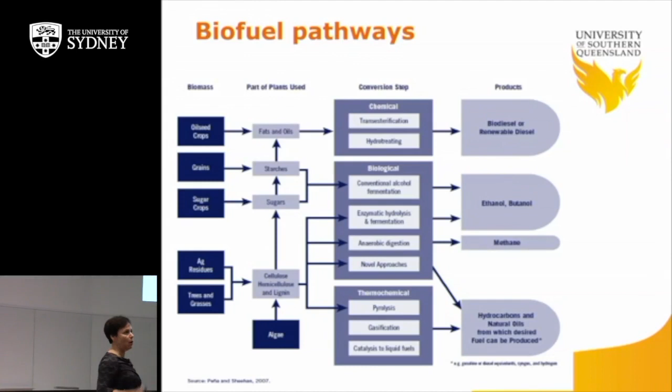Okay? So that's it. Important to understand from the outset that bioenergy includes a hell of a lot of feedstocks with a multitude of conversion technologies to produce quite an array of products. And the importance is that whenever we're testing the feasibility of a project, we're basically technology agnostic. We have a feedstock, but we want to be able to match the right technology so that we get the optimal conversion, right?

So going on to the next part is end utilization, or what are the products. We already had a look at some products, but how do we utilize bioenergy and what's its importance in place of renewable energy? So as we mentioned before, bioenergy is that renewable which is very flexible and will have some really important components that will add into the renewable energy mix now and even more so into the future.

So it's used across all of the energy sectors. So in that regard, its fit into the marketplace is very good. And what we mean is that it can be a form of bioelectricity. So for instance, when we're converting waste into biogas, the biogas can be run through gensets and that will be converted to electricity. So through combined heat and power, we can actually increase that efficiency so that we're also getting use of heat rather than just the electricity, because the actual conversion has a reduced efficiency.

So if you run biogas through a genset, you're probably only going to get about 35% conversion. At best, those gensets do about 42%. So you want to maximise the use of that end product, the fuel. And so if you actually combine that power with heat, you'll get about 90%. And this is where we're saying that it's for heat.

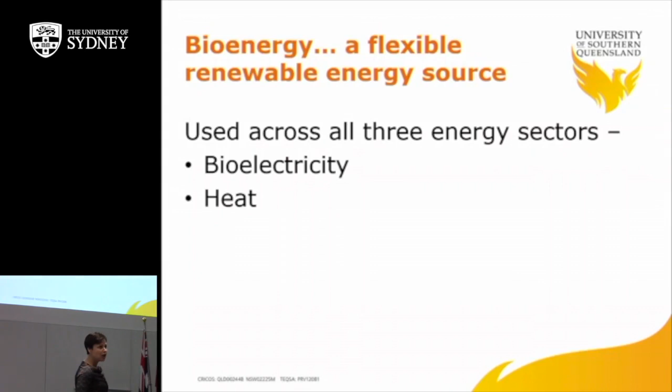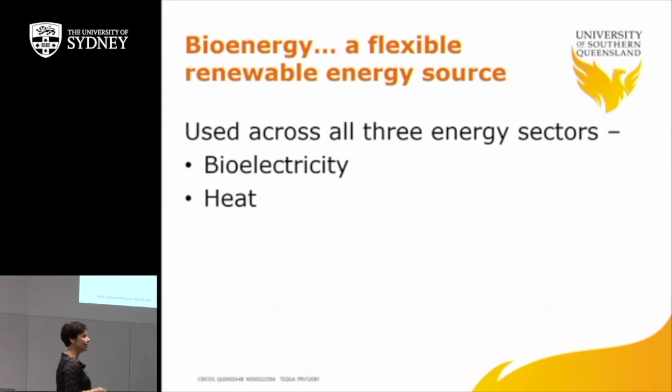In countries in the Northern Hemisphere, where it's very cold as opposed to us, heat is a very good way of utilising bioenergy. Less so in Australia, but we will obviously have other ways to use it in terms of electricity, and what's best to use in different countries. And more importantly, I think bioenergy will gain even more traction into the future as that source for liquid biofuels for transport. Okay? And I'll talk a little bit about that in terms of aviation as well.

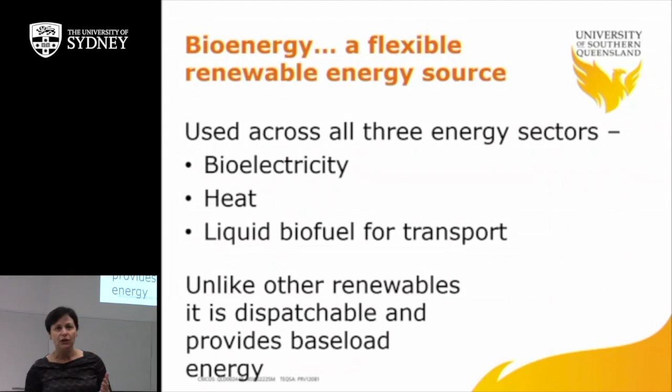There's another reason why bioenergy is important: it's dispatchable. Does anybody know what that would mean, dispatchable? Yep. Yeah, so you can use it at a specific time and start burning it, okay? So you can basically turn it on and off. When you've got renewables like solar or wind, they're only going to go while the sun is shining, while the wind is blowing. Whereas with bioenergy, so long as you've got the process running, it's going to keep going, right?

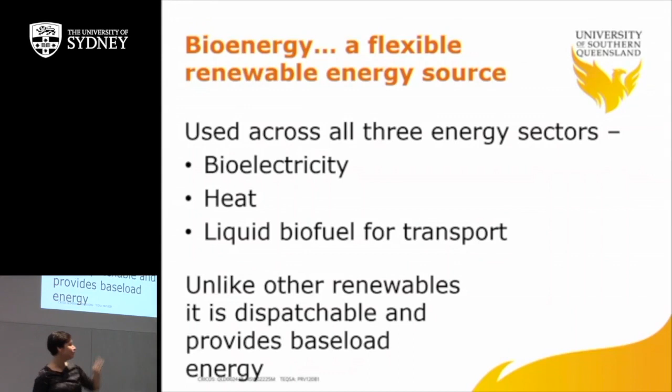It also provides baseload energy. What do we mean by baseload? Yep. Absolutely, it's the minimum amount. You guys know all this stuff. So, for example, our coal-fired power stations, they provide baseload energy. So in much the same way, bioenergy, give them a pat on the back, is going to provide that baseload power, right?

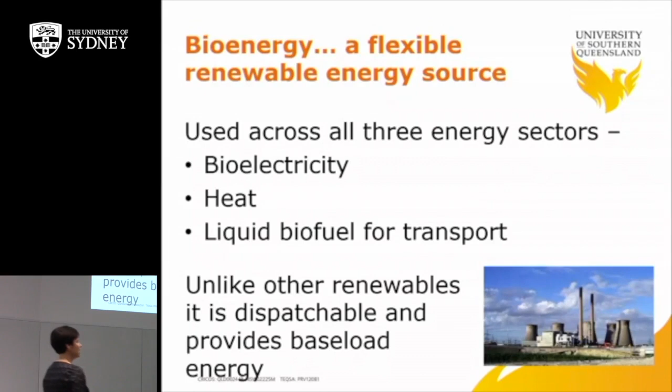And I think you guys have had a talk, or will have a talk, on smart grids, right? So I mentioned that in my interview. I don't know a lot about it, but I know that biogas, for instance, is becoming more important in terms of its use in smart grids as well, right? I won't talk about that because it's outside my expertise, but you can see that flexibility in bioenergy is really important. Okay.

So, I mentioned I was going to talk a bit about advanced biofuels. Not a lot, because I don't know a lot about it, but this question is posed all the time: are advanced biofuels for airplanes ready for takeoff, right? I think there's a number of things that are all coming into place so that they are, right? I think the last decade or so, we've seen a bit of a lumbering takeoff, slow and heavy, like these big things.

But what they've found through, again, matching feedstock with conversions to products, they're getting an understanding of what's socially acceptable, what's environmentally acceptable, and so on, right? So we've had some instances where, you know, the corn being utilised for ethanol, and then there's other things with, you know, the food debate.

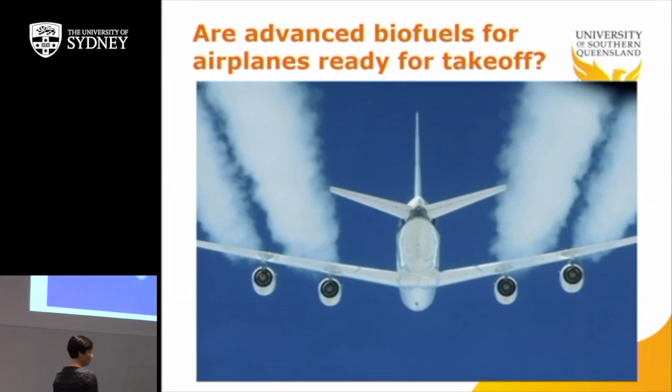And so they kind of become roadblocks to say, well, what's that next advancement? But I think into the future, there will be indeed that point where they've got the right feedstock, the right technology, so that you're not going to get some hurdles in terms of what's socially responsible.

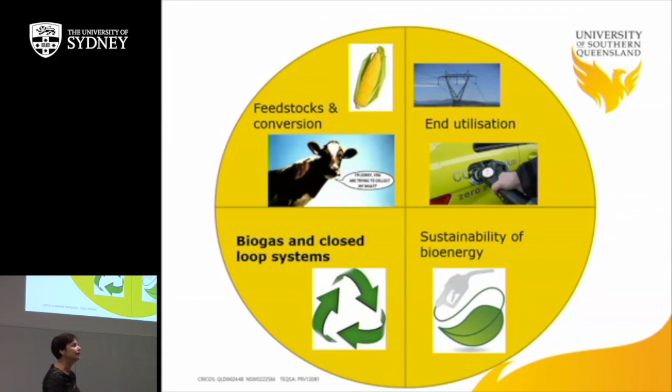So now going on to biogas and closed-loop systems. This is my area, right? I just want to recap where we are. So this is anaerobic digestion. How many people know about anaerobic digestion? Few people, right? Quite a few.

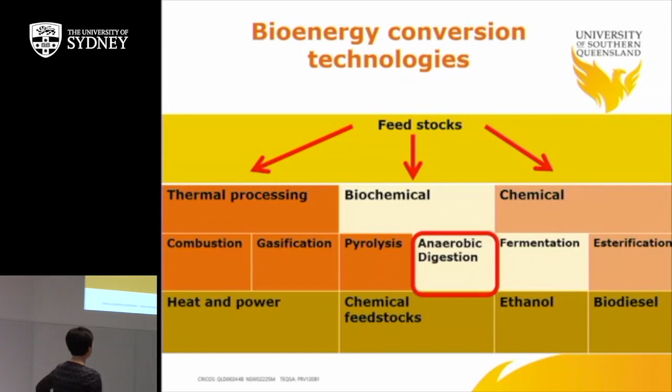So that's the most efficient fermenter we have in the world. It's the rumen, right? So we have ruminants, which are animals with four stomachs. They're able to eat grass, cellulosic, lignocellulosic products because they have a consortium of bacteria, protozoa, and anaerobic fungi, which are able to convert those feedstocks into biomass and provide it energy. So in much the same way that we are trying to capture that, they're doing it naturally.

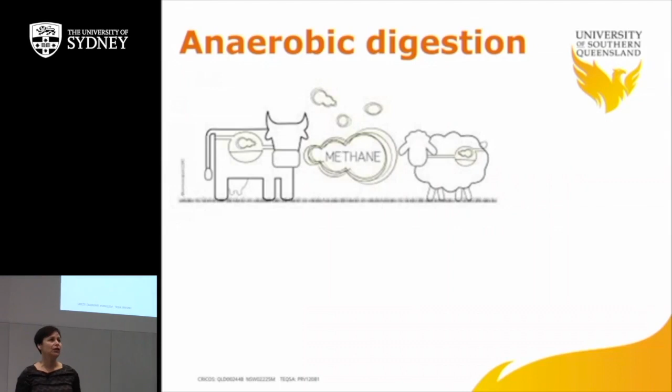This takes me back to what I used to do as a rumen microbiologist. So after I did my honours degree in microbial ecology here, I went on and did a PhD with CSIRO, Division of Animal Production at Prospect, which is now defunct. But what I was working on was trying to get these anaerobic fungi from these sheep, what we call fistulated sheep, and harnessing the cellulosic enzymes from those anaerobic fungi for industrial purposes.

So it's not really for the faint-hearted, but what we actually have here is a cannula that goes straight into the rumen so that we can take out rumen fluid and then isolate the bacteria, protozoa, or anaerobic fungi from there. Now, in terms of what anaerobic is, it's an obligate anaerobe. So we're looking at the anaerobic environment of minus 200 millivolts or something. So very, very anaerobic conditions.

So all of the culturing techniques that I was using had to be in a glove box. They had to be in highly reduced medium. So we also had things like cysteine in it to reduce it. But basically what I was doing way back in the early 90s was to isolate these anaerobic fungi, which are highly cellulolytic, and to try to co-culture them with an ethanologen, right? So an organism which can convert the glucose monomer to ethanol.

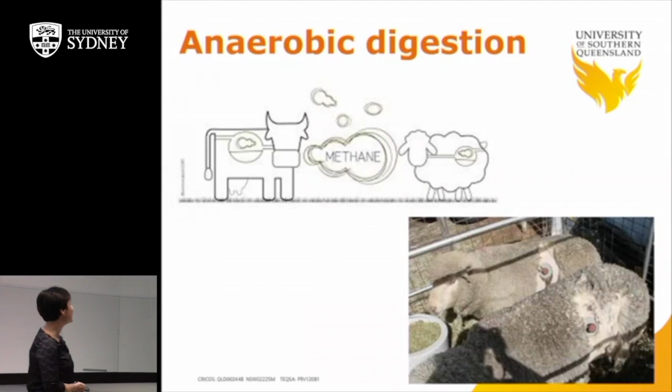Anyway, what we ended up doing is more along industrial application of just isolating those organisms for enzymes, which is really important even in bioenergy because we need enzymatic hydrolysis to get the most out of some of those really woody biomass feedstocks anyway. So I thought I was a bit ahead of my time. I was told by economists in Canberra, no, we don't need anything about biofuels, and we've sort of come round full circle, and I'm still working in biofuels, which is kind of nice. So, a bit of memory lane.

Now, to delve into a little bit of biochemistry, from the show of hands, there are probably about a third of you who already know a bit about this, and some two-thirds who may see this for the first time. But what I'll try and do is not make it too simple for you, but also try to extend your knowledge in this area.

I mean, it's interesting. I'm just thinking about myself. I didn't do any biology in year 11 and 12. I did physics and chemistry. Didn't think I was ever going to be a microbiologist. But I think it's really important that you have those fundamental sciences under your belt.

Because the first time I did biology was when I stepped foot into Carslaw building, my first lecture here. And I thought, yeah, I can handle this. It's the basic chemistry that you need, basic physics that you need, because you do enzyme kinetics and things like that.

It's really important. But anyway, the actual anaerobic digestion process is in 4 stages. The first one is hydrolysis, followed by acidogenesis, then acetogenesis, and then methanogenesis. So what we have here is a consortium of microbes which act together to produce an end product known as biogas, which is around 60-70% methane with the remainder carbon dioxide, with trace gases like H2S, maybe some siloxanes.

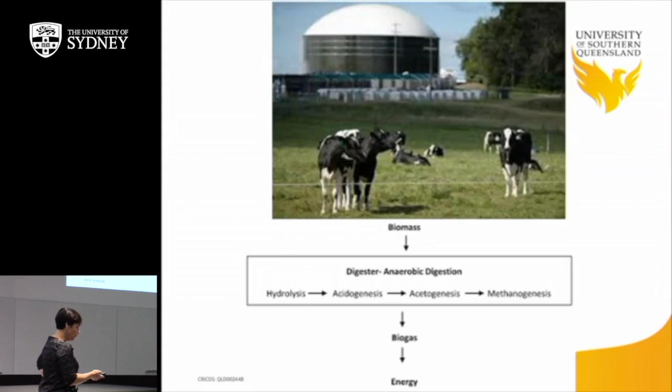Now, to plunge a bit more into some biochemistry, for those who want to know a bit more, we start out with our feedstock, or biomass. We call this suspended organic matter. And that organic matter is made up of 3 major macromolecules, your fats, your proteins, and carbohydrates, or these polymers. So stage 1 is the hydrolysis.

So basically, say with lignocellulose or cellulose, you've got repeating chains of beta-1,4-glucose, and then you've got enzymes such as the consortium of cellulases, which break down the various bonds, whether they're on the end bonds or in the middle, depending on what you're looking at. With the proteins, of course, you're going to have the proteinases that will break down the macromolecule into the amino acid components.

And with the lipids, the enzymes, lipases, will attach to the lipids to produce the fatty acids. The glycerol comes out around here. So that's our first stage. And in anaerobic digestion, when we're trying to optimize the production of biogas, we find that the rate-limiting step is hydrolysis. So this is what I was talking about, enzymes being very important in supplementing the microbial action and speeding up the process. It's the whole catalyst thing.

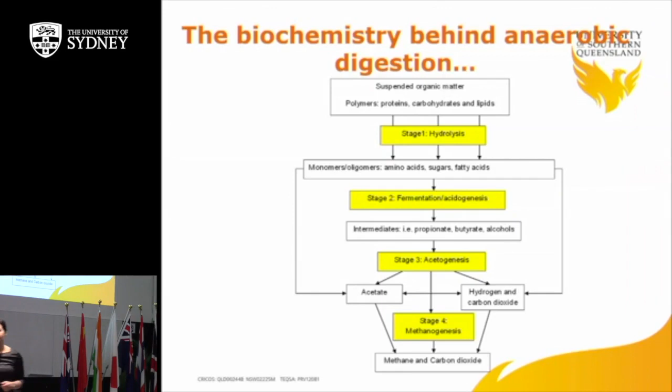Another important aspect, which not a lot of the biogas operators really look at, is buffering capacity. Right? Buffering capacity is determined by the amount of alkalinity. And what we see there is a ratio between your alkalinity and your total acids. And that ratio is really important to look at as well, because a drop in alkalinity is going to be a better indicator than your pH, because if your pH starts to drop, then it's probably too late to do anything about it.

So it's really, as I said, important to do this process monitoring and control, mainly because we've got methanogens, which are the ones at the final stage with about a week generation time, a lot more slow growing, a lot more fastidious or fussy compared to the acidogens, right?

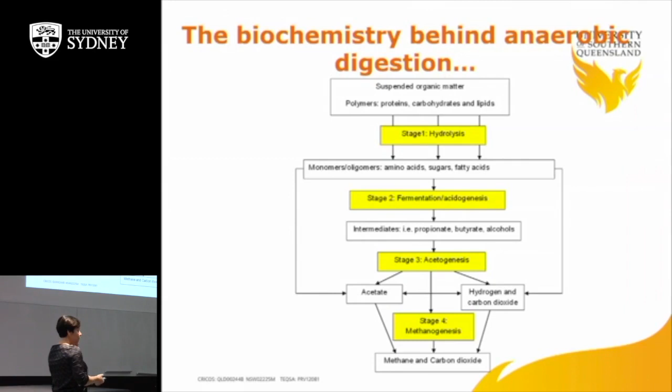So we're operating at around about 3% total solids. You can get dry AD as well, which operates at 15% and up. And again, it depends on your feedstock. Once you've got this receival tank and you're happy with the mix, as I said, it's got to be the right mix for the organisms. We put it into a digester, which is normally heated mesophilic.

Mesophilic is a term which says that it operates between 15 and, say, 40. But our bugs for anaerobic digestion love 38. It's like the body. So they'll heat it at around about 38, and we'll also stir it so as to bring about homogeneity. Once they've got the biogas coming off, it will then go into storage post-tank treatment as well. And then that can be recirculated, depending on how much of your volatile solids is left or your organic strength.

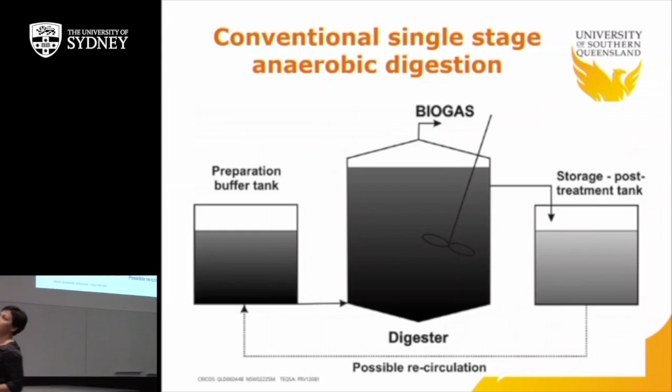Now, in certain cases, we can actually split the process into what we call a 2-stage anaerobic digestion. So this kind of goes back to the metabolic pathway which I showed, which said, okay, we've got acetogens and we've got methanogens. So this is taking advantage of those 2 different types of organisms and trying to make each of them happy so that we can control that.

So I was talking about the different levels of technology. The large majority of biogas production actually comes from the developing nations like Nepal, India, and even China, where they're actually using very simple containers which use the scraps from their kitchens and, say, from the cattle. They put it into these digesters, get the biogas, don't even really remove the carbon dioxide, and they're using it for domestic purposes like cooking.

Now, the impact that this sort of system, so small systems, has on the developing nations is huge in terms of its positive impact. So I did a conference down in Canberra last year at the Crawford Fund, which is around food security. And we talked about the impact that these sort of simple things have on developing nations. So we can think about, say, in Africa, where you have women who spend hours and hours just simply gathering firewood for fuel, right? It could take 4 hours.

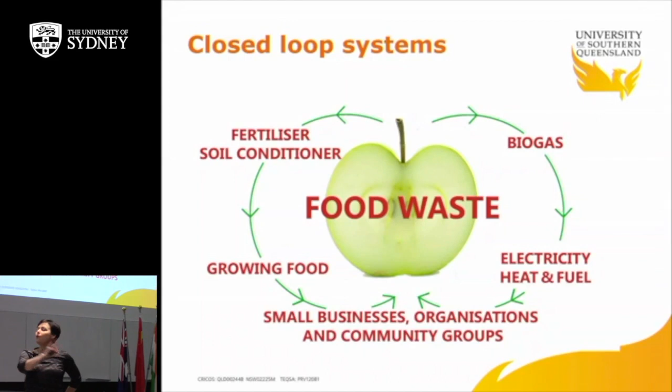For all those American guys out there, you guys are doing a good job too. Disneyland, they're doing corporate responsibility. A couple of years ago, they put in an anaerobic digester. They're collecting food waste on some of their theme parks there.

And I just read about New York City. They are getting their collection system so that the Big Apple is collecting their food waste. Now, can you imagine that? New York City is huge, isn't it? I'd love to go there. That is going to be a huge, huge logistical operation, but they're doing it, right? So there's things happening there.

In Australia, we have 3 anaerobic digestion facilities which take food waste. One's in WA at Jandakot, Richgro. That's actually a really good example of a closed-loop system, because Richgro, if you guys know, they're a composting company, and they're making use of food waste that's coming in along with some other waste, digesting it to produce electricity for their own site use, and any excess is being put into the grid at a very low FIT, mind you, but that's Australia. And they're then going to bag the digestate for compost, because that's what they do.

But the next step they're going to do is any of the carbon dioxide which is being removed from the biogas is actually being fed into their greenhouses so that then they can produce more food for plants. So a really nice thing there.

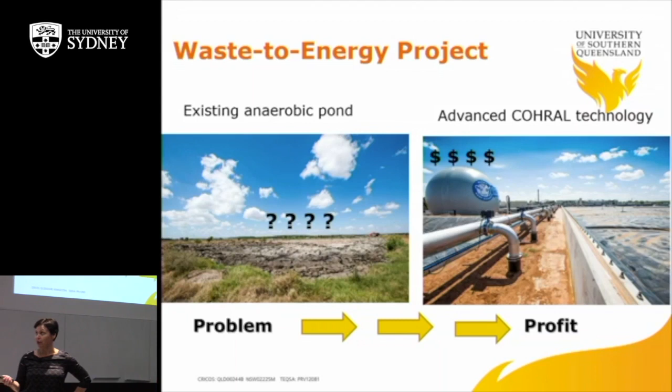They did do the calculations, it was about 45% they want to supplement, which is quite a large amount. We're getting there, and I think in a year or so we'll be able to get to the maximum amount. But with that optimisation comes some really important lab studies that we need to do. So working at a field level is really hard. As I said, particularly in this area, I guess with any area, you've got a multidisciplinary team of scientists, engineers of all types, whether they're chemical, electronics, mechatronics, biochemical, and also economists at the end, because if this doesn't actually make money, then it's not going to be any good.

But the key to this is this thing here, which a lot of engineers think is a black box. I'm afraid it's not. There's living organisms there that you need to keep happy. So this is where the process monitoring and control comes in. On this side, we've got all of the various important parameters, like temperature. We know that if you're operating at mesophilic, you're going to be the best. And because this is unheated and not stirred, we get a nice drop in biogas production over winter time. I've been seeing the sheets just last week.

We had some cold nights in Oakey. Darling Downs is not as good a temperature as you might expect of the Sunshine State. We're actually on the Great Divide, so we get some pretty chilly temperatures, -8 sometimes. So that impacts on the temperature of these lagoons, and with that, you're going to get a drop in biogas production. But what we can do is minimise or regulate the flow of feedstock so that you're not going to get a build-up of volatile fatty acids, because this is another one that we're looking at. The alkalinity one's another important one.

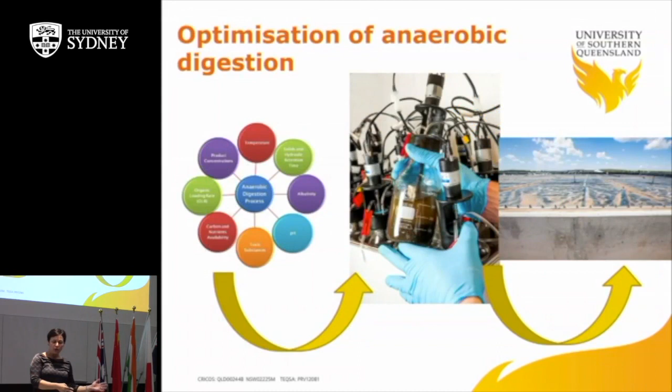That's a closed batch, which means that it runs for a maximum of 30 days, but we don't have a constant input of feed. We have other digesters at 10 litres, at 30 litres, which then simulate these conditions a lot better. So we're helping optimise this system, saying this is what's happening in the lab, and talking and working closely with the plant engineers to make it happen.

So there's just some of us out there collecting wastewater samples. This is a thing called a save-all, which is where all the wastewater comes. It's not for the faint-hearted. If anybody's been on a rendering facility, it's a bit smelly, but you get used to it. And it's interesting how you can bring all that smell back to a lab as well.

But then again, I've always been part of that, I guess, right from my PhD days when I was collecting rumen fluid and fecal samples from animals like elephants and giraffes and things like that. So there's a bit of a common theme there, I think. My aim is to make shit sexy.

So, coming down to the last section, what about the sustainability of bioenergy and what are its prospects into the future? So, just a bit of a blurb here about some things that IRENA have put forward. IRENA is the International Renewable Energy Agency. So that's that big entity that sits across the globe and supplies a lot of information to the International Energy Agency. One of my roles, apart from doing academic research, is a national role with the International Energy Agency representing Australia in Task 37, which is energy from biogas.

So what that allows Australia to do is sit around a table with 14 other member countries who are doing biogas and exchange ideas about what your best practices are, what's the economics behind it, what sort of technologies are coming through. So we meet twice a year and we discuss all these things, and then we try and report that back to our country so that we can increase the adoption of biogas in Australia.

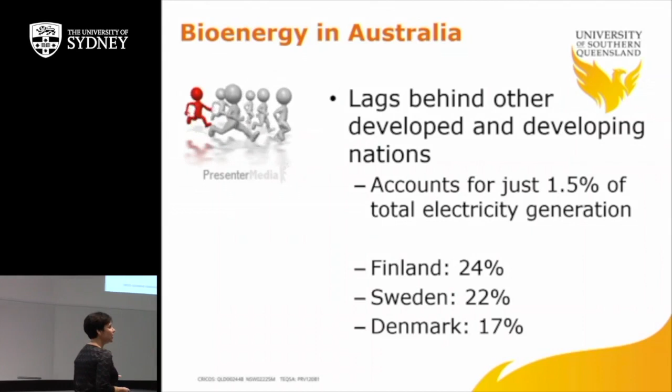So I said there's two major things with bioenergy at the moment. The one is policies, and the other one's climate change. So they go hand in hand, really. Which leads me to the last bit, around communication. It's vital. It's the thing that's going to make people aware of what's going on and how they can then vote and be more informed. So I just want to go through this example, and I'll show you a little YouTube clip to show how people are starting to communicate the message so that people can actually get an understanding.

So instead of growing a commodity which they'll have to sell off, when they don't know what the prices will be, they'll grow something because they know that if they stuff it into that digester, they're going to get energy. So it's a different way of doing energy crops, which don't compete with food. So in goes the feedstock, out comes the electricity into the grid, if they've got a good enough feed-in tariff, and they will make use of the leftover sludge as digestate to fertilise their crops. Nice closed-loop system. They can then supply biomethane to the grid.

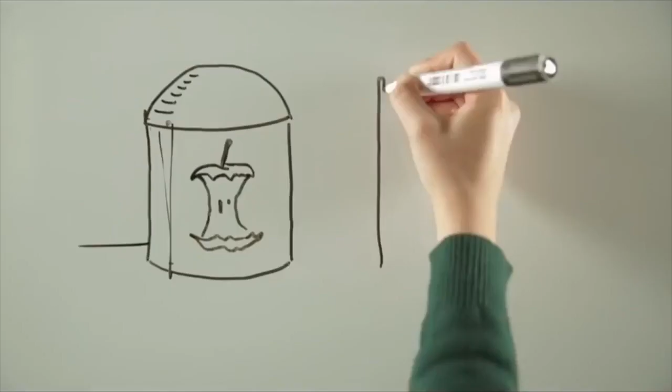If, with the manure of a farm, instead of just amassing it for compost making, we use it to produce heat, it doesn't stink, it doesn't pollute, but it could warm schools and hospitals. We would all benefit from it. If, with the peel and scrapes of fruits and vegetables, instead of just binning them, we produce electricity for hundreds of families, we would all benefit from it.

If, with damaged crops, instead of disposing it, we produce biomethane, we would avoid importing biofuels from tropical countries, decrease goods traffic towards big plants, and make our vehicles greener and cheaper. We would all benefit from it. If instead of leaving fallow land, we increment crop rotation, and with the second harvest we produce digestate, the land is more fertile, agricultural businesses are more efficient because they get rid of chemical fertilizers, and we improve the quality of the food we bring to our tables. And we all benefit from it.

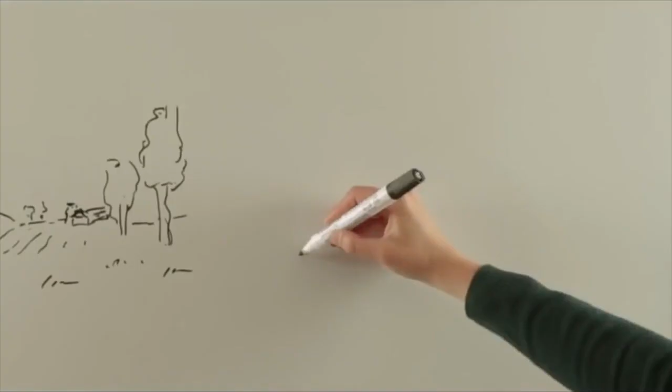If the plant is well designed, proportioned to the agricultural business it's meant to, and managed adequately, it doesn't smell bad, and it doesn't impact on traffic deriving from long-distance transports or waste, and companies make the most of their byproducts. We all benefit from it. If we make out of biogas an excellence made in Italy that offers jobs to an increasing number of people, we all benefit from it.

A biogas plant is not a monster that burns waste, but a great resource for the environment and the territory that enables agricultural businesses to be more efficient and competitive, reduce our chronic dependence on other countries' energy, as well as providing electricity, heat, digestate, the natural fertilizer, and biomethane, the eco-friendliest fuel on Earth. So, if biogas is done right, we all benefit from it.

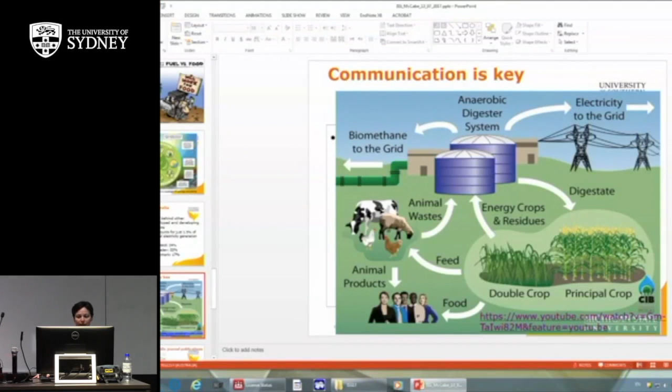So that is just one example of the way that we can communicate the likely benefits to inform the public. I chose that example because, as biogas becomes a bit more advanced in Australia, what you're going to start to get is a little bit of kickback from the public, okay? So in Italy, they've had to do these things, even though they're quite advanced. So that was just an example.

Along the communication side of things, I just wanted to talk a bit about how I find communication is important. Right? As a researcher, first and foremost, a KPI I need to fulfill is publications in journals, right? Publish or perish. But equally important is that communication out into the wider public. In fact, I think that has far more impact than any research that's tied up in these scientific publications. If it doesn't go beyond the scientific community, we're simply preaching to the converted, right? What we need to do is actually go out beyond there and inform the public so that they are not misinformed, because it's amazing how misinformed they can be.

So over the last few years, particularly how I've seen my role with the International Energy Agency, to try to get it out there in the public, also to work closely with industry as I do in my research centre, I go out and I produce opinion pieces in The Conversation. How many people read The Conversation? Yeah, good. I don't expect many high school students do, because it's basically aimed at the general public, and it's a platform for academics to put out their research with a bit of journalistic flair.